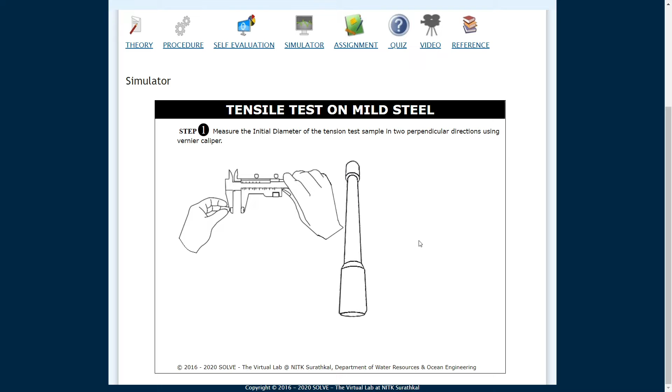Let's begin with step number 1. Step number 1 is to measure the initial diameter of the tension test sample in two perpendicular directions using vernier caliper. Okay, the first value we get is 12.70 millimeter. The second value we get is also the same 12.70 millimeter, which makes the average initial diameter 12.7 millimeter.

The next step is to measure the length of the specimen between the grips using a scale. These are the grips, from this end to this end, and on the other side, this end to this end. The length that we want to measure is in between, from here until here. The length between is 200 millimeter as shown.

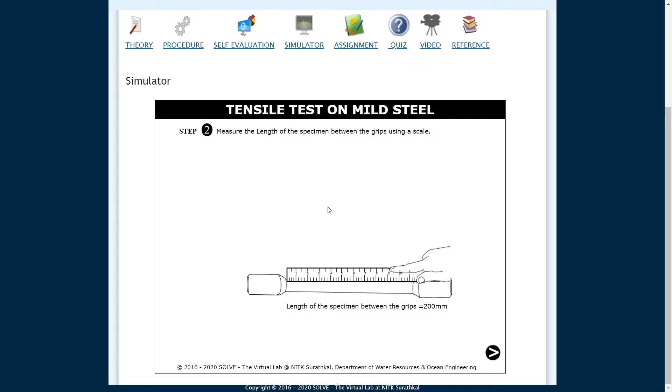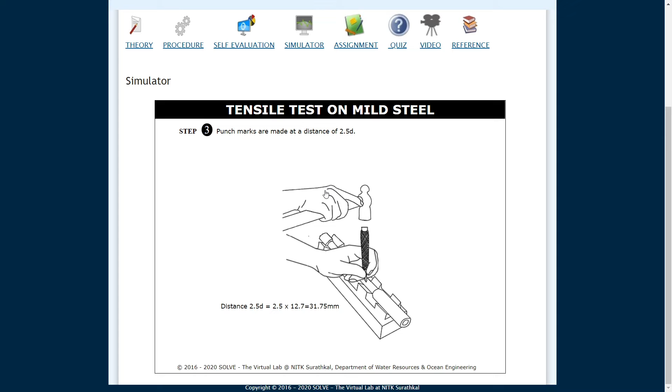The third step is to make punch marks at a distance of 2.5 diameter. We go 1, 2, 3, 4, 5. There are 5 punch marks in total.

The next step is to insert the specimen into position and mount the extensometer onto the specimen. First we release it, and then we drag the specimen onto it to make sure. Then we tighten it up again.

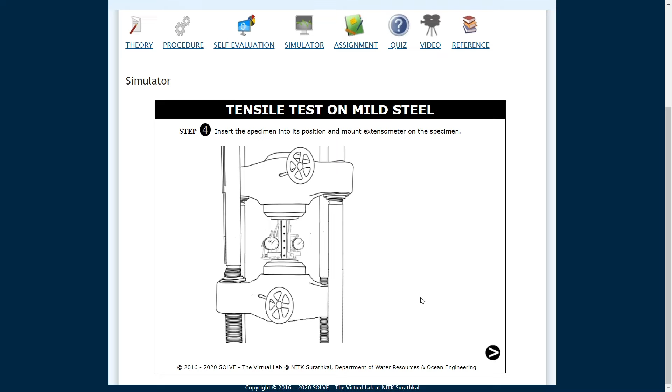Before starting anything, we have to make sure the readings on the dials A and B of the extensometer are adjusted to 0. This is to make sure there is no false reading. The least count of the extensometer is 0.01 millimeter.

Step 6 is the experiment is conducted. Load extensometer readings are read at regular intervals of load up to the yield point. Ivory scale readings are noted till the specimen failure. First we turn on the machine. After turning on the machine, we will start to gather data, as you can see.

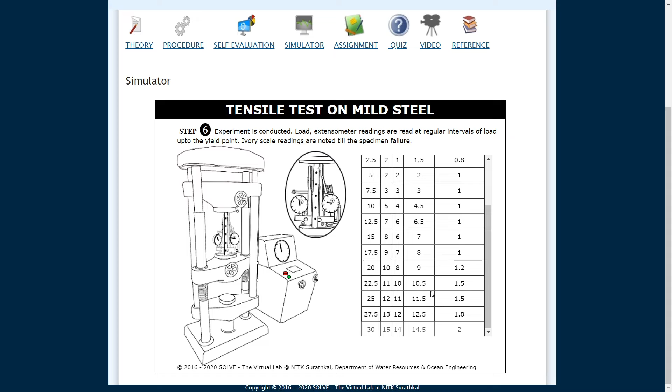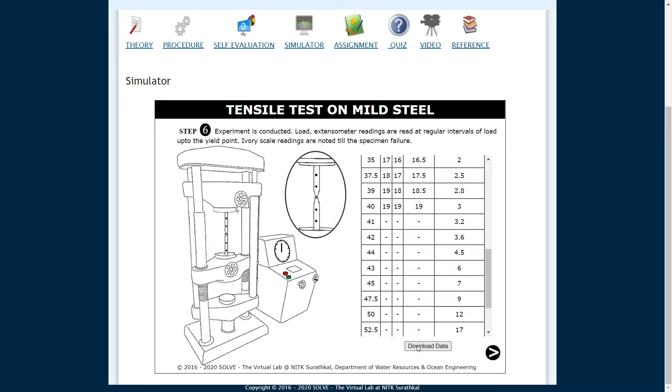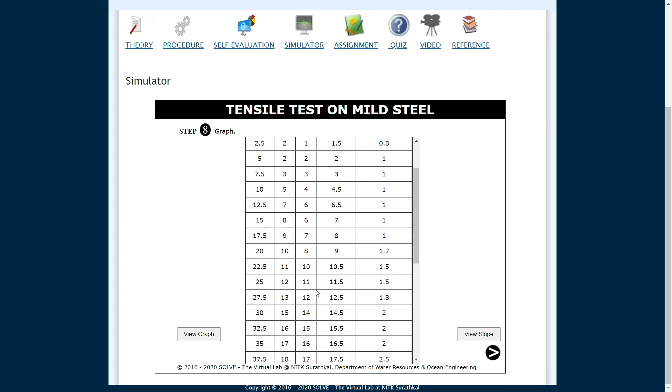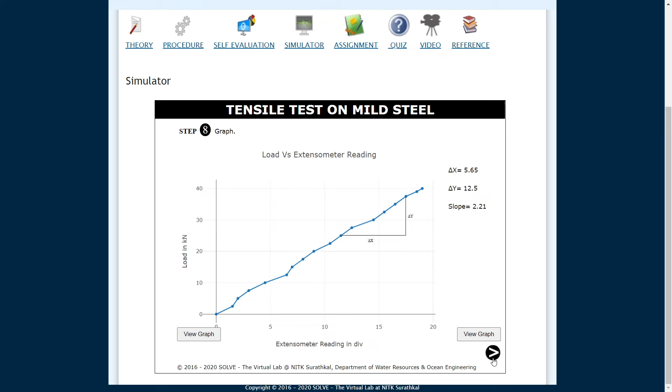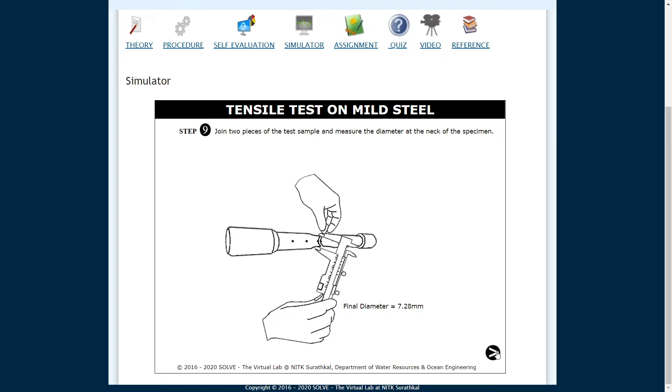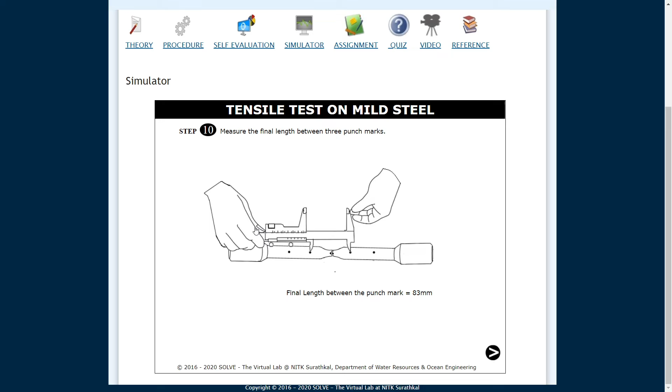Step number 9 is to join the two pieces of the test sample and measure the diameter at the neck. Basically we're going to combine the pieces and calculate the final diameter. The final diameter is 7.28 millimeter. On step 10, we have to measure the final length between 3 punch marks. The final length between the punch marks is 83 millimeter.

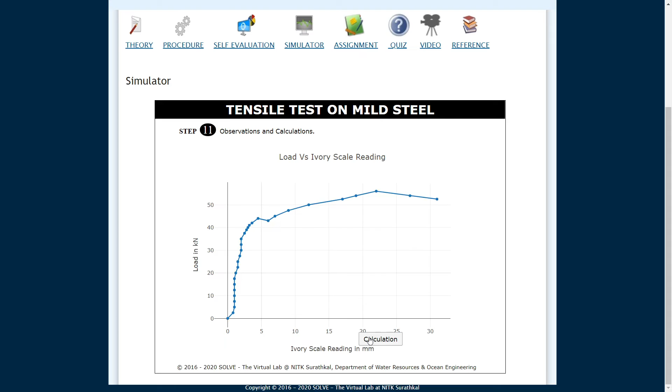For the observation and calculations, the first question is to find the yield stress. To find the yield stress, we have to use this formula: the yield strength point divided by the original area. To find the yield strength point, we have to go to the graph. At this curve, we have to see which is the highest, right here, which is 44. And then to find the original area, we look here: 126.61.

So 44 kilonewton, once it's converted to Newton, will become 44,000, divided by 126.61, which is the original area. We will get the answer of 347.5239. Okay, so we put the value inside here, 347.5239.

To find the tensile strength, we have to first find the maximum load. For the maximum load, you have to see the highest peak point, which is 56. Okay, 56 kilonewton is equivalent to 56,000 Newton. So 56,000 Newton divided by the original area, which is 126.61, we will get the answer 442.3031. So we will enter the calculation here, 442.3031.

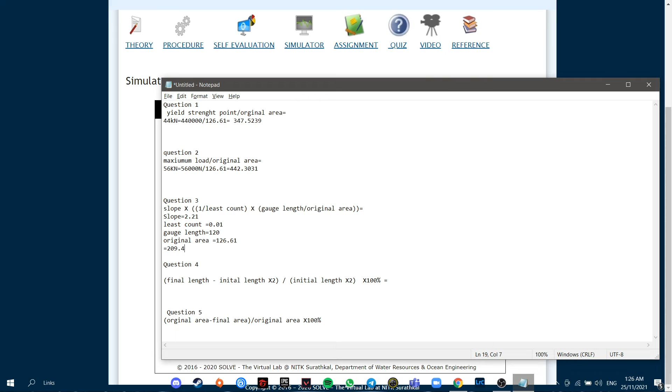After this, we get the answer of 209.462. So we just enter the digits here, 209.4621.

To find the percentage elongation, we have to use this formula, which is the final length minus the initial length times 2, divided by the initial length times 2, and then to find the percentage, times 100. The answer that we will get from this is 29.8905.

For us to find the final length, we have to go here to the observation and see this is the final length. This is the initial length. The initial length times 2 is equivalent to 63.90. After we calculate the percentage, we will get this answer. So we have to put it there, 29.8905.

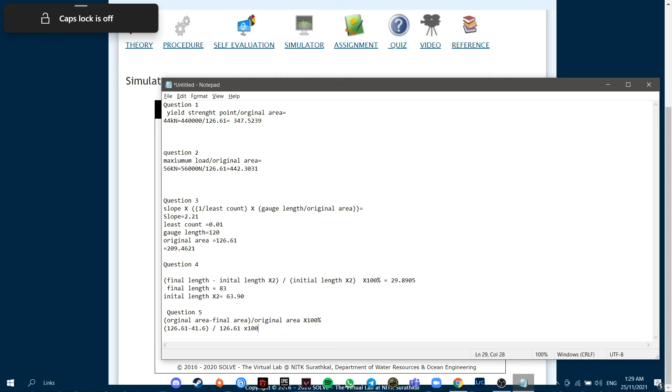For the fifth question, we want to find the percentage reduction in area. We have to use the formula of original area minus the final area, divided by the original area, times 100 to find the percentage. So this is 126.61 minus 41.6, and then the answer of this will be divided by the original area, which is 126.61, and then times 100 to get the percentage. So the total answer of this will be

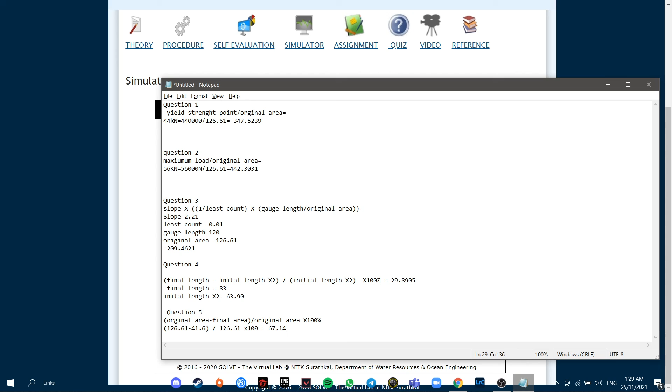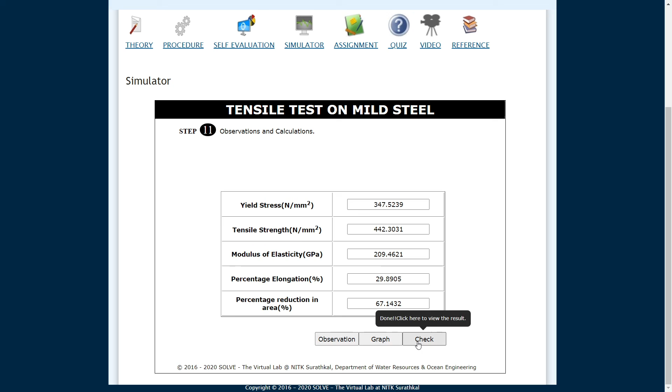67.1432. Okay. To find the final area, we have to go to the observation, and then we find the final area, which is 41.61. So now we can check our result. You see, there's almost no percentage error. For clearer calculations, I will put them into the next video, the next picture for all the clearer calculations.